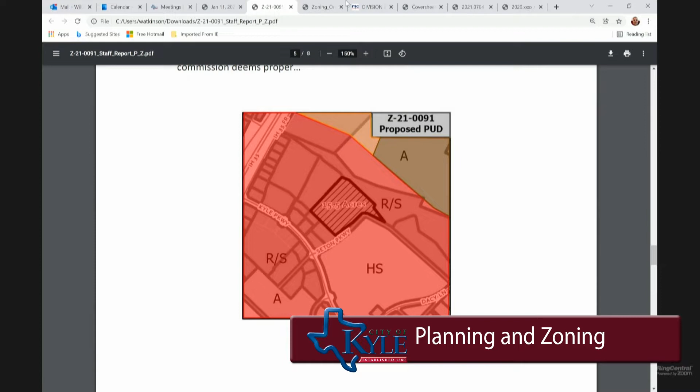From a comprehensive standpoint, comprehensive plan, everything on the screen there in red is the super regional node. It's the highest intensity and density of land use inside the city of Kyle. The site's entirely within it. You have a Newtown community and regional node to the north across the creek there. MXD is recommended in the super regional node, and its intent is to create density and walkability and development patterns that match that. So what they're asking for is 100% on board from that perspective.

What they are planning on doing, I already mentioned the 2 vertical mixed-use buildings. They'll be the main entrance into the project. The northern vertical mixed-use building is intended to house a microbrewery or something similar, and an outside dining entertainment area to help create a vibe spot right next to the trail itself.

In my staff report, I have approximately 1,900 linear feet of the Vybe trail. That is an estimate. It may not be the exact number, but when they come in for site development permits and related permits, if it functions the way they're showing in their concept plans in the back of material, that's what's important. Putting in some parallel parking along the southern boundary and the western edge of Seton Parkway with associated urban streetscape.

There are certain exemptions in our MXD code that better help bring this project to fruition that we have in the PUD. Again, the 4 non-vertical mixed-use buildings, the changes to the parking ratio calculations to better make it easier to massage a little bit. And then they're going to be dedicating right-of-way for the future Seton Parkway expansion across the creek to the north. That's on our transportation master plan.

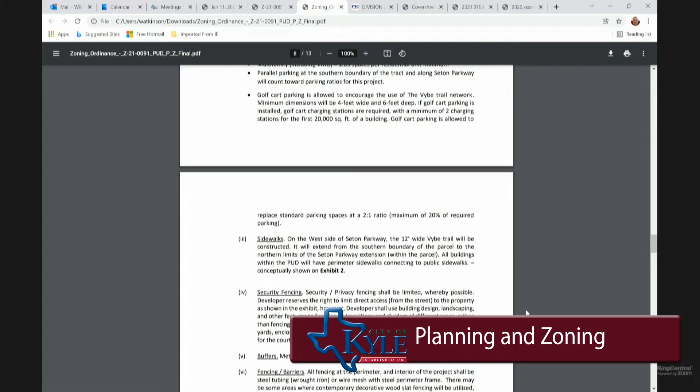We're looking at adding golf cart parking, certainly on the vibe spot itself, but they can also add it in as well. That's going to be further on down the list in our packet today where we're talking about actual code amendments to the Vybe stuff. 12-foot wide trail, some limits on the ground floor commercial, what they cannot have, some changes to the setback lines and what have you. And then it references sections of the MXD code to make it, again, more palatable.

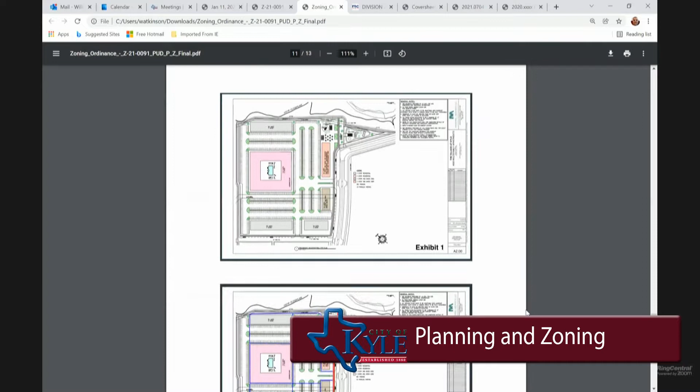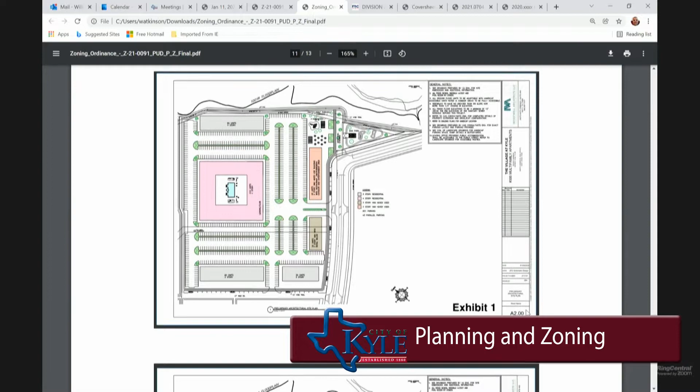You can see here on the screen as it's scrolling up, this is the general concept plan. It's not going to be exactly like this, but as long as it generally conforms with this idea from a code perspective and a design, that's what we're looking for. The gray line along the southeast-west, and then going north, is the Vybe Trail, and the orange and the brown buildings are the vertical mixed use. This is the sidewalk system that we expect, or something similar to it, the blue being internal sidewalks, the red being the Vybe Trail.

And then the green right there is going to be the street trees along the Vybe Trail.

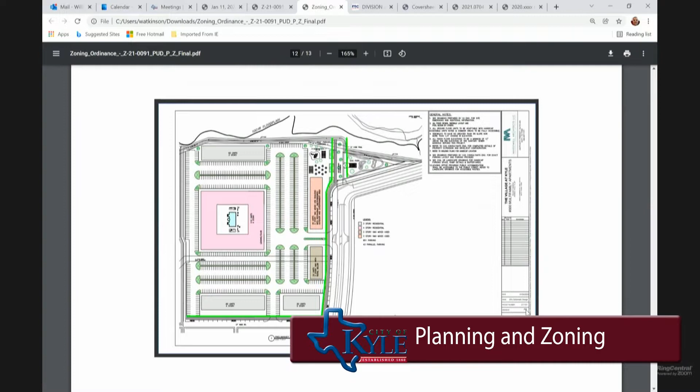Do y'all have any questions for me? Any questions for staff?

Along the lines of our conversation today, and just for my fellow commissioners, when I looked at this, I mean, this is an awesome project, first of all. I love the retail. We're all about mixed use, vertical housing, all of that. It's beautiful. And just for me personally, while I've worked with communities that are food deserts, I think Kyle is a microbrew desert. We could use a few more in town, so I think that's a plus as well.

The real challenge I had was the multifamily housing and that intersection. That 4-way stop is a serious hazard right now. It is 6 lanes across if you count the turn lanes, and it's just not appropriate for a 4-way stop. So I couldn't support the density of adding housing on that site without something being done with that intersection.

Again, the Transportation Master Plan does state that there's an expectation for a traffic circle there. I'm not a civil engineer, so when I say this, it depends on the engineering, but a single lane traffic circle is probably going to be too small for that intersection. So it'll probably need to be at least 2 lanes, but it needs to be engineered appropriately.

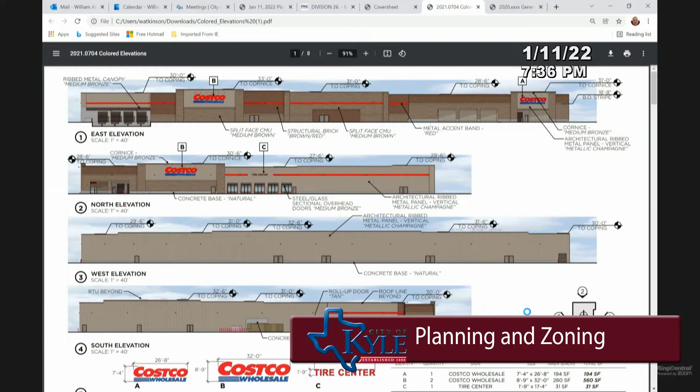Right here we have a perspective on the entry of the project. Here's the north side of it. We have - I believe that is still the front side of it. Yep, if you're looking in from the southwest. Here's a view of the gas station if you're coming in from the huge, I don't even know how tall it is, monument sign that's up there.

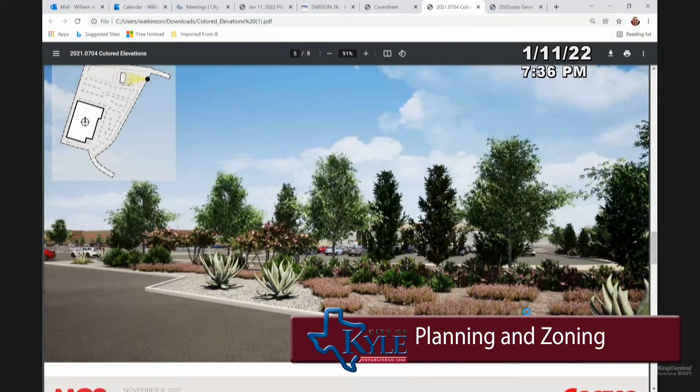If you're coming in right there and you look to the left, that's the view of the gas station, their renderings. And that is the view of Costco if you're coming in over by the Sunoco, if you're right up next to it. This one's a little bit different from that perspective, but it's similar. And right here we have the elevations for the fuel canopy.

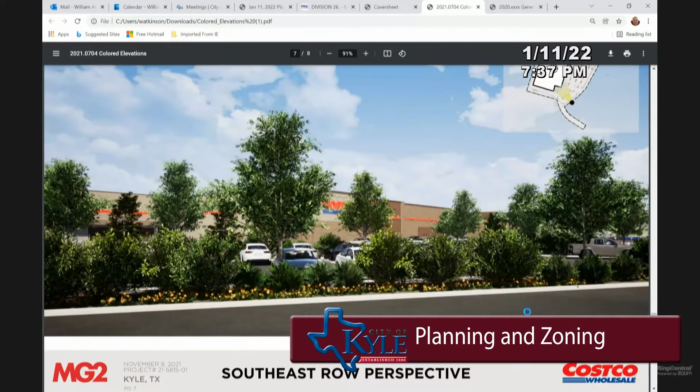Now, Costco is a project that, with all the surveys the community has had over several years, everybody has been wanting for a long, long time. And within the last year, they finally approached us and said, we want to be here. As part of that project, they have to go get all their permits - they have to get their subdivision. They already got their zoning, but site plan, conditional use permit, building permits, and all that kind of stuff.

Y'all, as the Planning and Zoning Commission, have the authority to be flexible when it comes to the I-35 overlay. Now, generally, we hold tight to our standards because we expect them to be the higher end standards. Costco has done that from the east elevation, the side that most people will see. They've done it largely on the north side. The south and the west side are not. I'm not going to sugarcoat it. However, this project has a lot of expectations for it to be moved through.

But I want y'all to vote as y'all feel fit, but I also am hoping that y'all will vote in recommending, or actually voting to approve it as it's shown. Now, the reason for that is the facade is not everything. So as part of the agenda item that we have up here on the screen...

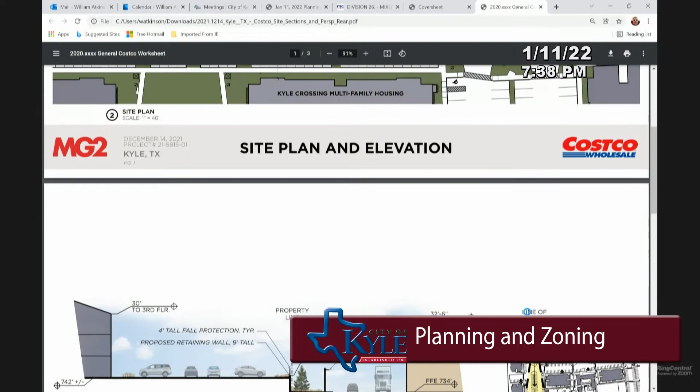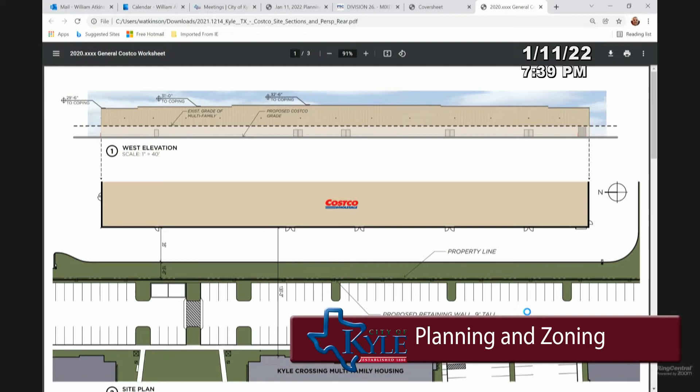Right here you're looking at the rear of the property. So if you are standing inside the multifamily project and you're facing east to the back of Costco, you can see the dashed line there. It separates what you can see if you're standing on the elevation of the apartments above it. There's about an 8 to 10 foot difference versus what's hidden below it.

And the apartment complex also has a lot of landscaping along the buffer as well. I failed to add that into the backup material, and I apologize. But between Costco and the apartment complex, there's actually a lot of buffering, and also a lot of elevation change disguising it and kind of shielding it as well. So from the combination of the elevations and also the buffering, the site is largely compliant. It does not meet the exact specifications of the I-35 overlay, but given the scale of the property, the size of the building, and what they've done to buffer it from the residential, staff is okay and recommends the approval of Costco. And we ask that y'all do the same.

Do y'all have any questions? Any questions for staff?

Yes, Commissioner Chase. Just one. Any opposition from those owners of the multifamily? So the conditional use permit is not a public hearing per se, so we don't notice the surrounding landowners. Okay. That was it. Thank you.

Vice Chair McCall? Yes, it's the material that's not, from the side that's not directly visible from the I-35 overlay or corridor. Is that that's not? The materials aren't quite up to snuff when it comes to the I-35 overlay. We require 90% masonry. That's the biggest thing, the south and the west face of the building. They are asking to put metal paneling on it. But with the buffering behind it, it's fairly well hidden actually on the rear, and also the landscaping that they have.

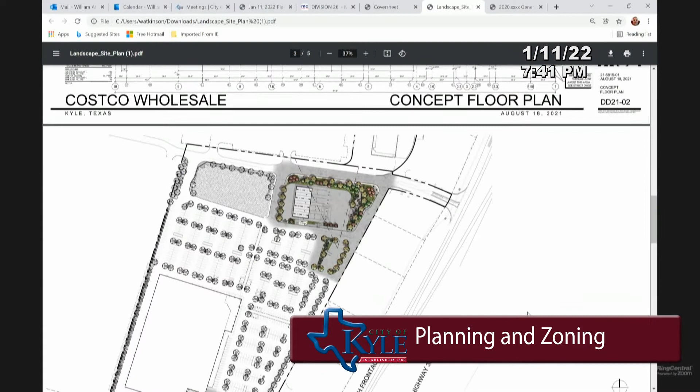So right here is the landscaping elevation shown. They got quite a bit on the site. They've done a lot to protect the view shed, or at least from the front. When it comes to landscaping, when you're coming into the entrance of the shopping center, they have a string of trees along the back, along with shrubbery and what have you. And then there's approximately an 8-foot difference in elevation as well.

So the combination of all those - if it was just on the same elevation, flat, and not a lot of different design elements from that perspective of the site, I'd have a little bit more heartburn about it. But it doesn't bother me as much as I honestly thought it would initially.

Thank you. Any other questions for staff? Okay, I got a couple.

So here on this map that you have on here now, what is that area next to the gas station? That gray area in the northwest corner? Correct. For right now, it is landscaping. There is a potential that they may add future parking depending on demand for Costco. But if they do that, they have to account for parking ratios on the overall site for the shopping center, not just for Costco. So we have to make sure that it doesn't exceed certain parking standards that we have in place for the shopping center.

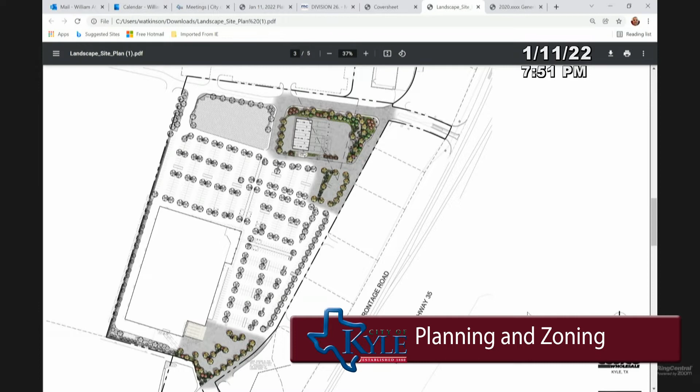Thank you. Are there any other questions for staff? Okay, if there's no other questions, can I have a motion? Mr. Chair, Commissioner Chase. I'll go ahead and make a motion to approve item 8A as presented. Second? Thank you, it's been moved by Commissioner Chase, seconded by Commissioner Snydow. Is there any discussion on the motion?

Okay, yeah, I in no way want to be the guy who says no to Costco, because that will not be a popular guy. With the issues with the apartment complex behind it, I'm not as concerned, because no matter what, there's going to be commercial there. If it's Costco, if it's someone else, that's what it's going to be. They're going to see the back of a commercial building, and I think that's fine the way it is. I want to make sure I said my piece about what I was concerned about with the truck and the parking, but other than that, I do support the item.

I hear that, but there's also going to be restaurants all along I-35 there. So when you're coming down I-35, you're not going to see that back, because you're going to see a Starbucks and whatever's next to Starbucks. All of those are going to shield it too, from 35. Okay, any other discussion? All right, all those in favor say aye. Aye. Aye. All opposed? Motion passes.

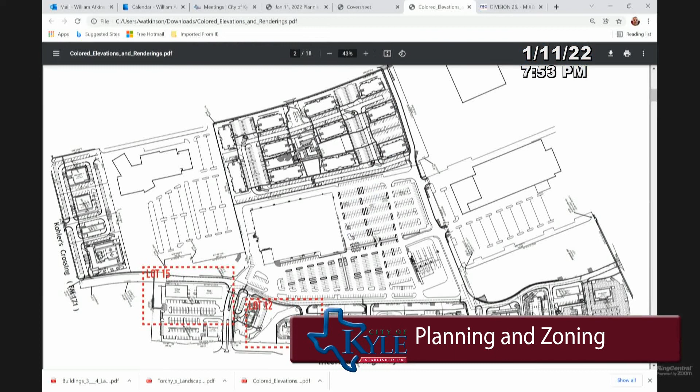Will Atkinson for the record, senior planner. Before you, as stated, we have a combined 2 lots for a conditional use permit. We have the Torchy's, which is the freestanding unit on lot 12, as you can see on the screen there, that's the right dashed square. And then on lot 15, we have 2 retail buildings, 3 and 4. Retail buildings 3 and 4 probably have letters of intent from a leaseholder, but we don't actually know who's going to be in there yet, so they're moving forward with a design from the shell perspective.

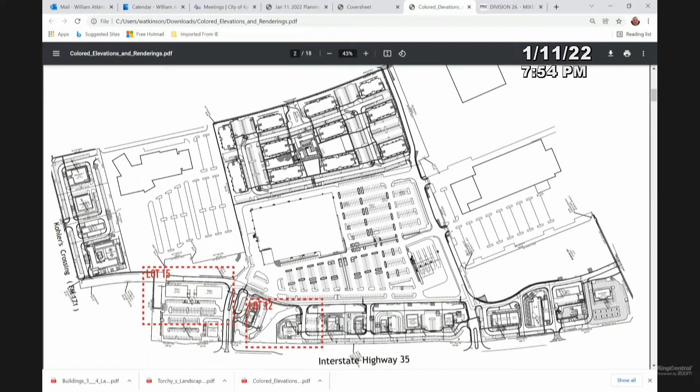Here's a blown up site plan of retail space 3 and 4. You can see the Starbucks over to the right, or the lot for it, and the main drive going in.

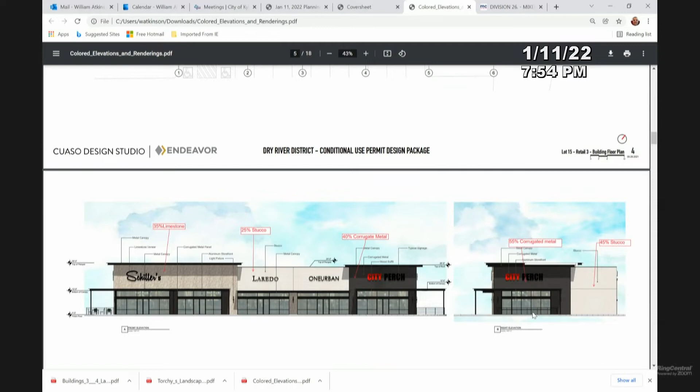So you have a combination of limestone, stucco, and corrugated metal for the front and the north elevation, which is the right elevation. On the south elevation, which is left, we have limestone at 65%, stucco at 30%, and corrugated metal as well. And on the back, we have 100% stucco. This is for building retail 3.

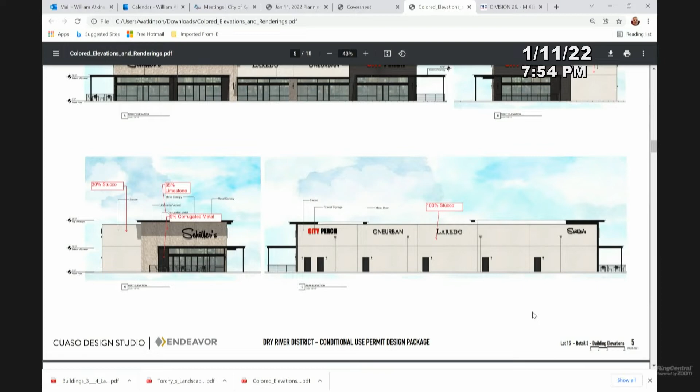It's similar but different to the Costco, obviously in scale and architectural type, but it doesn't quite meet the requirements for a 90% architectural requirement for masonry. However, the cohesive design of it actually makes it better. We shouldn't be afraid to allow metal paneling if it has a cohesive design.

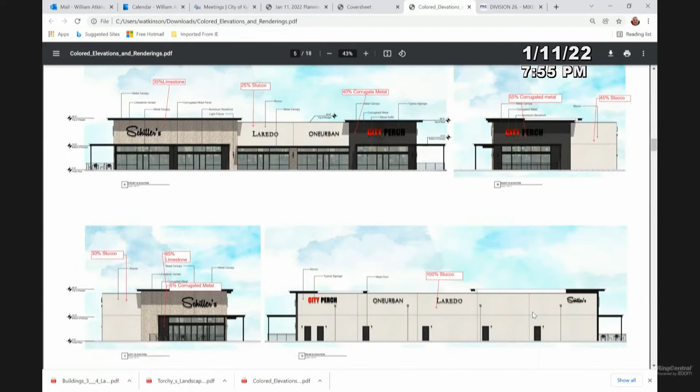So staff has no problems with retail building number 3 there. It gives a more modern look to it. Here is building number 4, which is going to be paired with it on the same lot. They have a mix of stucco, corrugated metal, and limestone, with a little bit different shade of limestone on there, and in the back of it as well.

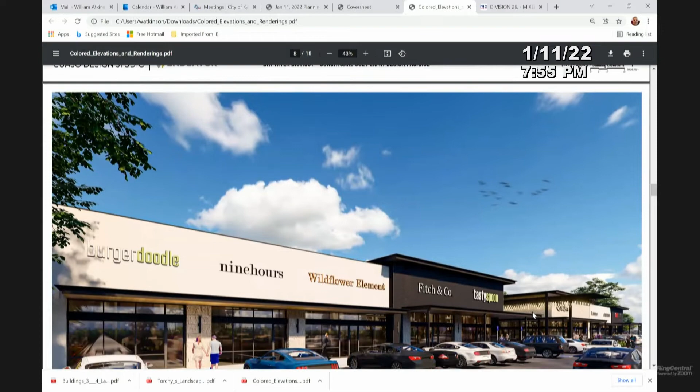And here we got some perspective views of it. So they're going to be combined, and they got a little shared walkway between them, as it's shown on there. So it kind of has a little gathering area, makes it a little bit nicer.

Are they going to have that same type of metal railing for the pergola type shade? I don't know that design specifically, but it looks like that's the case.

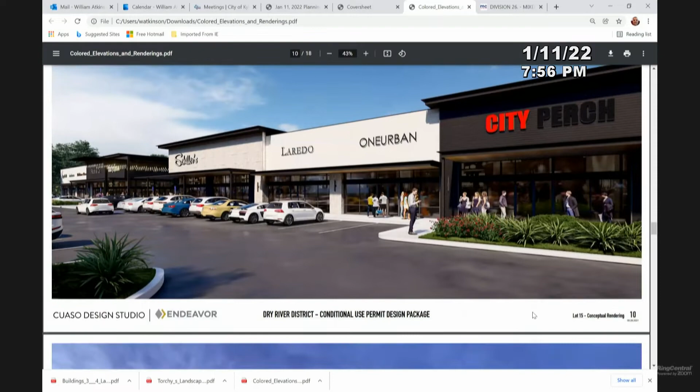Here's another perspective view of it. Here's what it looks like at night.

And then we're getting to lot 12, which on the site plan is restaurant 15, but in this case it's Torchy's. This to the left is where Starbucks is on restaurant 7. So you come in and then you go around the backside and to the right of Starbucks, and then you take another right as you cross the little creek there, labeled Channel A.

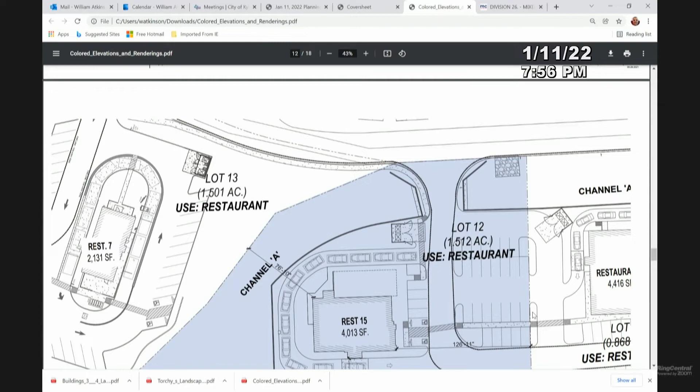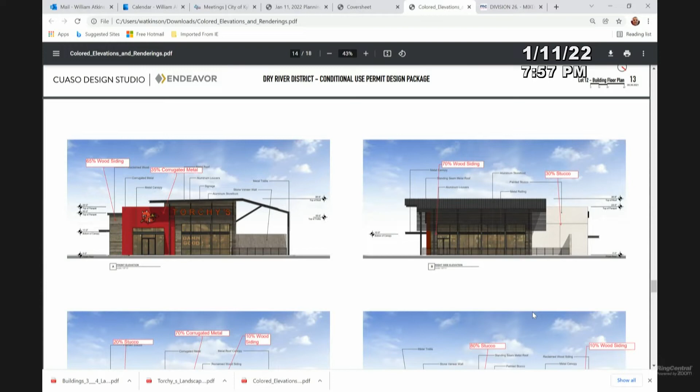And this is Torchy's. They actually have a lot more metal and wood siding. But again, the design is what's important and is what should be approved. It's definitely not something we've seen from a design perspective. It's very unique, and it's very architecturally interesting, and they've gone above and beyond.

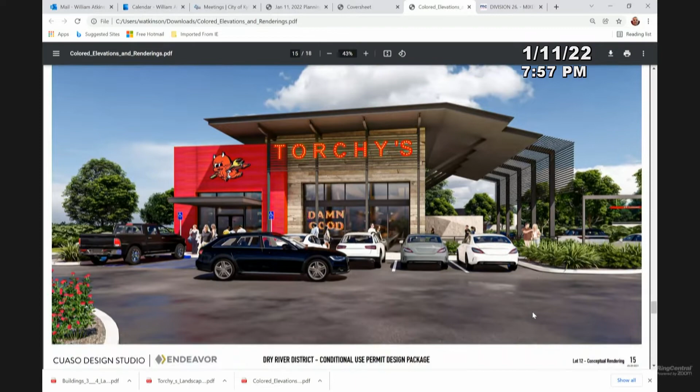And staff has no qualms about wanting it approved from a design standpoint. Here's a rendering of it. Here's also the dumpster enclosure. And so that's the elevations.

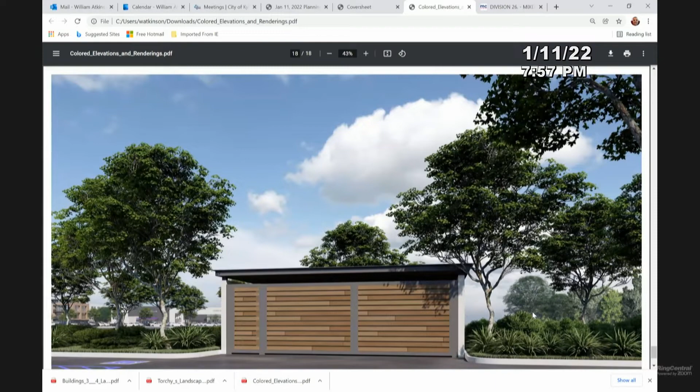We also have a landscape sheet for building 3 and 4 if y'all want to look at that. It is code compliant. There's nothing wrong with what they're wanting to do there. And they got the pass-through area as well.

And then we have the Torchy's landscape sheet. Let me scroll down a bit. Oh, there we go. And it's where you come in from the west side and you get in the parking lot there, and they have a drive-through that actually has quite a bit of stacking capability.

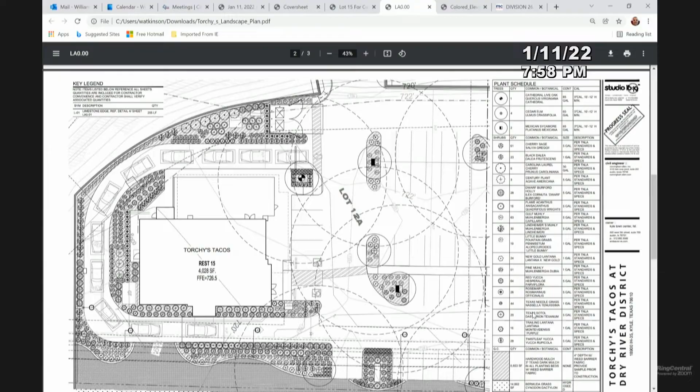And so these projects are compliant. They blow the intent out of the water for the I-35 overlay. They don't quite meet the architectural standards, but that's okay. What they're wanting approved is exceptional, in my opinion. So we ask that y'all approve both, or all 3 buildings, actually.

Thank you. Are there any questions for staff? Yes, Commissioner Snyder. I love it. I love the design. I think it's awesome. So actually, I don't have any questions, I just wanted to say how much I love the design. Cool. Thank you. Any other questions?

Yeah, I have a question about the masonry. Does that not include any other stone? There's limestone on it, right? So shouldn't that be the percentage-wise or whatever? Yeah, so the way it reads, it gives a few bullet point items of what we should expect from a masonry perspective, whether it's limestone or rock generally, brick, split face CMU, which it's not my preference for CMU, but it works per the code, I guess. It can look nice. And then it talks about stucco, where it talks about in detail applications only, but it doesn't give a percentage. So when staff's talking with a developer, we generally consider that around the windows and the doors, maybe there's a banding of it or something like that. But it does make it difficult to give them a specific metric.

However, on the flip side, when an architect gets absolutely creative, it also gives a lot of flexibility, to where if we are, in the end, when I'm done reviewing it and I'm comfortable bringing this forward to y'all, y'all have the opportunity to say yeah, we like that, or no we don't, or make this adjustment.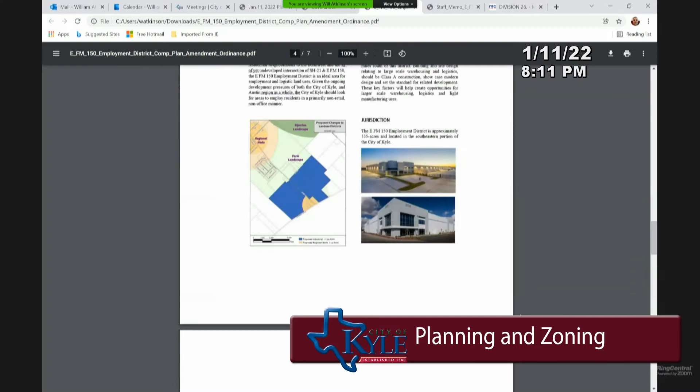So that's approximately the area. It's kind of a little bit pixelated there, but that's what it's going to look like in the end. It's going to be a large area.

Now, some of it is floodplain, and they'll have to account for that when development happens, if the comprehensive plan is approved. But the area in tan at the intersection is the regional node, and the area in blue is the 535 acres, approximately.

There's little bits of it taken out up in the northwest side. There's a church there, a couple houses, and then there's this middle school and elementary school right there as well. And when it comes to site development permits, there's going to be landscape buffering and what have you.

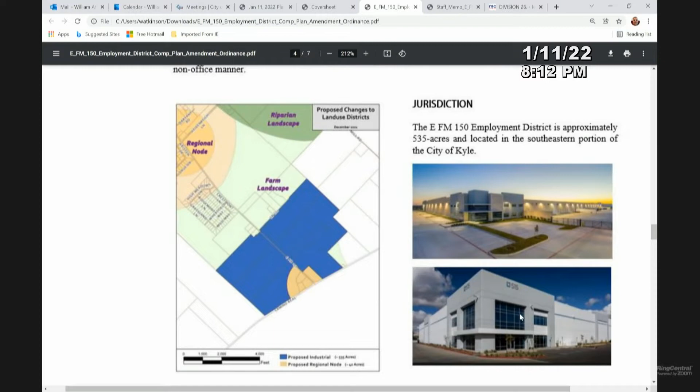So it is a large-scale development type, though. That's pretty much my presentation.

I do know we have a protest opposition. It probably needs to be read into the record related to that as well. That's what you have, a document up there, and it was provided to us. The biggest thing is they are mentioning that County Line SUD actually has a CCN here on this site, or in this 535 acres.

From the documents that I've seen, that's not the case anymore. They had approached the Public Utility Commission to say, yeah, we want to incorporate this area. But in July of last year, the Public Utility Commission reduced that boundary, actually. And I have a document showing that. I probably should have put it in the back of the material, but I do have it.

So it looks like this area pretty much doesn't have a CCN. So staff is beginning discussions internally on how to eventually service this from a wastewater perspective. So it's not quite ripe yet from a development standpoint, but we want to have the foundation in place to be able to move off of that and start building on top of that.

Did y'all want to read the opposition into the record at all?

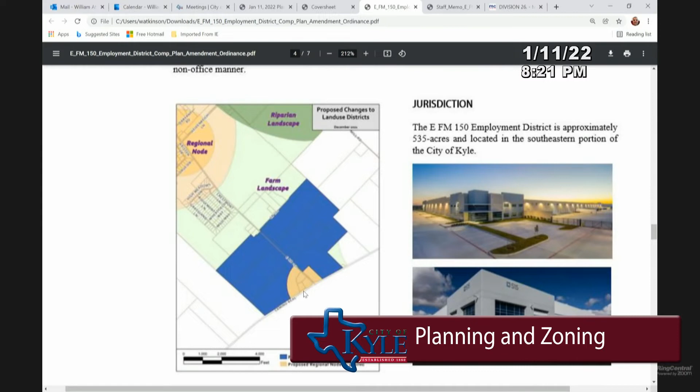Now, if y'all want an amendment to increase or take all the frontage along Highway 21 as retail opportunity, that's fine. If you wanted to make it a regional node, I don't think that's a big issue, especially with pad sites along there. But keep in mind that the East FM 150 Employment District also considers having retail or office already in it, so you could capitalize along 21 pad sites from a zoning and retail perspective. So I think from the perspective of the creation of this district, it still works.

Personally, I'm okay with the change, because before, the reason I pushed so hard for it to be regional node the entire way down was so we didn't have much of Kyle on 21. And the one area we did have, I didn't want a subdivision or something to go right in on our one small area of 21. But here it seems like that's not going to happen.

Even if it's not a regional node, it's still going to be warehouse, manufacturing, something instead. And I kind of like the idea of them having access from 21 instead of having to get access from 150, so I'm okay with that change. I don't know if everyone else is, but that's why I wanted the regional node to be as big as it is.

Here I could go either way. Okay, are there any other questions for staff?

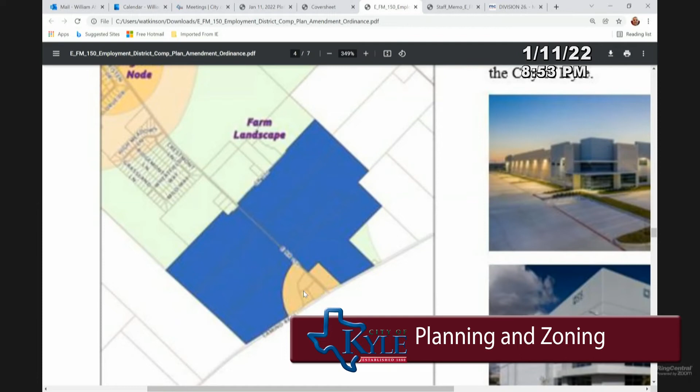With comprehensive plan amendments, we do not notify specific landowners or property owners. We notice it in the newspaper and online, but because it's a general land plan for the area, we don't, and by law we're not required to notify these specific landowners. For example, whenever we asked the question about putting light industrial or construction manufacturing warehouse back along I-35, we had to notice it in the newspaper to bring it to the council, but we didn't notify any of the landowners along there.

Whenever we expanded the land use districts, when our ETJ expanded, we didn't notify any of the landowners out on the west side or the northeast side. We just expanded it, and we had the public hearing because we had the public notice in the newspaper, and we noticed it on our website as well.

So 7's A and B under zoning, those would have been public notice, with a sign up on the land saying we're specifically having a hearing about this rezoning. Since this isn't that, technically we're doing an overlay of the land that's saying this is an approved use. And I'm assuming that if a landowner were to sell to an end user that wants to change the use, that would have to become a public hearing, right?

That is noticed, yes. So the way a comprehensive plan works, like I stated earlier, it's a foundation that we base all our recommendations off of. Let's say one of them comes in wanting to do a large scale warehouse project. Well, then we look at the comp plan and say, okay, can you do that here? And with this being approved, we'd say yes, you can. Then we start having the conversation: okay, so you need to change your zoning district to account for that. Because even though we're changing the comprehensive plan, we're not changing the specific zoning on each individual lot.